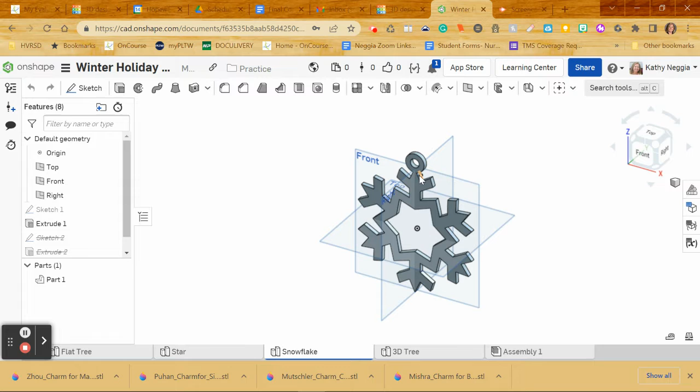So I'm looking at one of my holiday ornaments, and remember I can hit the P to turn off the plane so I can see it a little bit better. Just going to click on it and right click and choose export. Unfortunately, we can't export directly to an SVG, so this needs to be a two-part process.

So make sure that you have a file name, make sure that you have a format of STL. It needs to be binary and millimeters. Even if you measured things and did everything in inches, make it millimeters because Tinkercad recognizes millimeters and so do 3D printers. Okay, so let's export that, and you'll notice I have a file that just got downloaded.

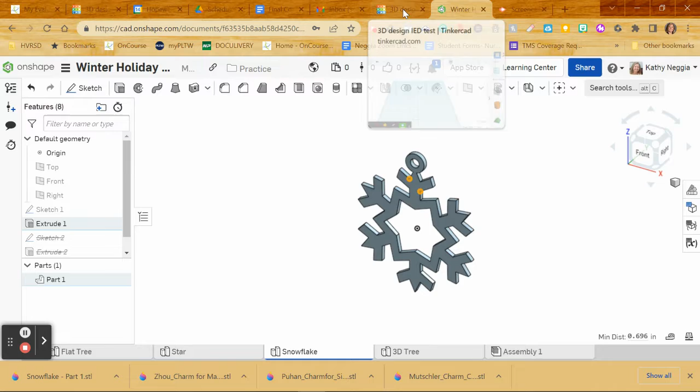Let's get into Tinkercad. Okay, I'm in a file, and you want to name this properly so that when you export it, your file is named appropriately. So make sure your last name is in it and snowflake, tree, whatever it is that you're downloading. Okay, so I'm going to import an object, and I'm going to import that snowflake that I just exported.

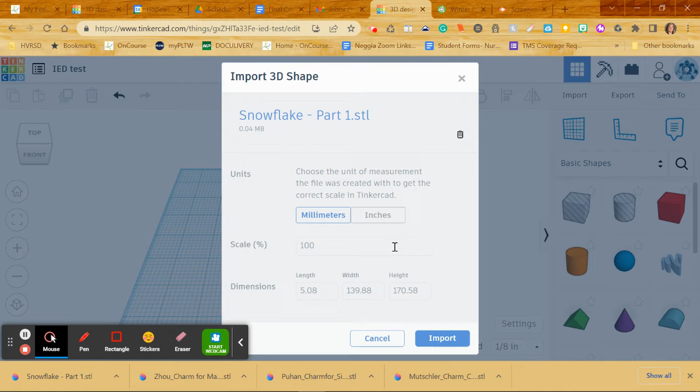And notice it's really pretty big. Oh, we're in millimeters. Oh, so we're okay. We're going to bring it down a little bit. So I'm going to bring it down like 50%. Okay, so I have it. But notice, since I created it on the front plane, it's not laying flat on the print bed. If I exported this as an SVG, it would just be a big rectangle.

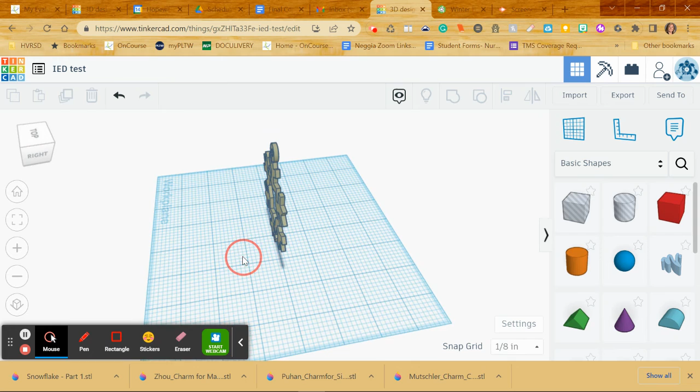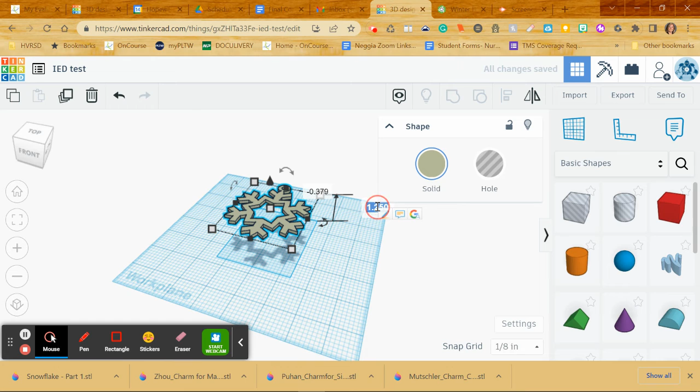So I'm going to need to rotate around and rotate this 90 degrees. Okay, when I do that, now it's levitating. So now I need to drop it. So to drop it, I'm going to grab that little cone, click and drag it. I'll click in here, whoops, and make that 0. And now I'm flat on the build plane.

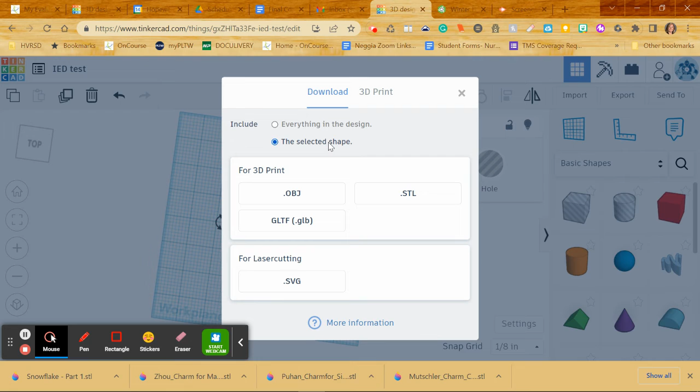Okay, so now I have a file that looks good, everything's connected, and it's time to export. So if I have more than one object in my file, it's important that I select the object before I export. I'm going to choose export, and I can either choose everything in the design or the selected shape. I want to export it as an SVG file. So I'm going to click on SVG, and it's just downloaded.

So once you have your file, you can attach it to the assignment and submit it. Hope this helps.